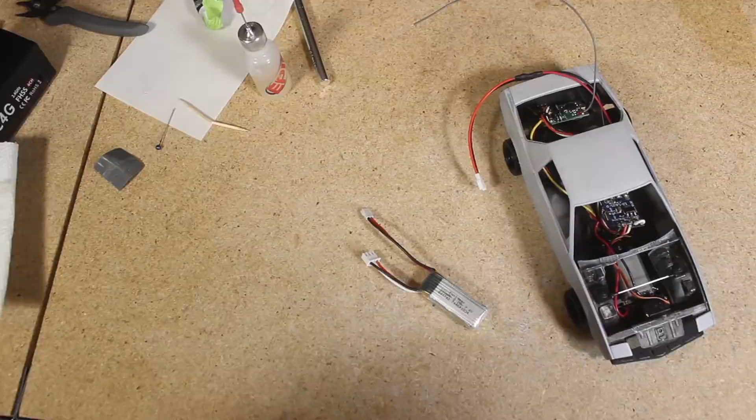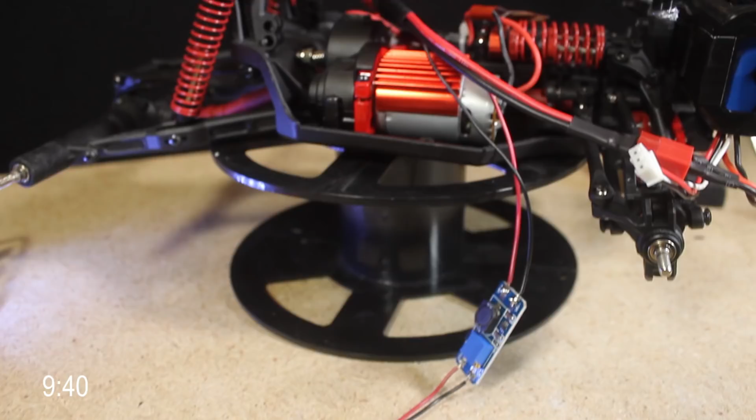Hello everyone! In today's video, I continue with the Firebird Drift build by designing, printing, and beginning to install some drift missile-inspired modifications, and I continue to make progress on the 72 Chevy Prerunner build by completing the post-print finishing work on the bedside pieces, as well as coming up with a way of mounting them to the truck, and I begin wiring for the lights.

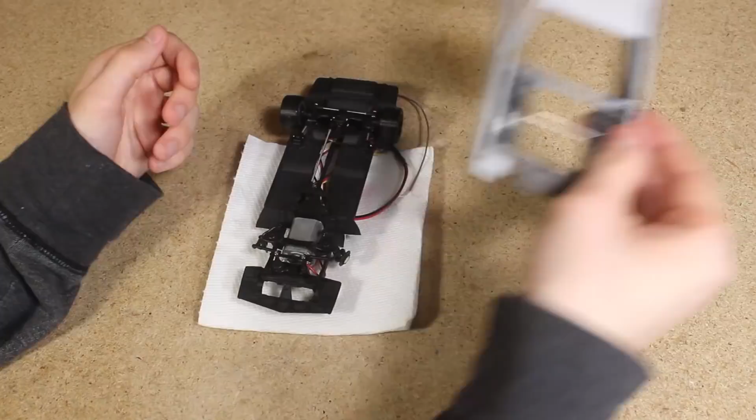Starting off with the 1/24 scale Firebird Drift project, this has been a build that I've showcased many times previously, showing the process of converting this Monogram model car kit into a fully functional and highly detailed radio-controlled vehicle. As I discussed the last time I featured this project, with the electronics, drivetrain, and suspension designed, printed, installed, and the car functioning well, I'm beginning to move on to focusing more on the cosmetic aspects of the car.

With that said, I did spend a chunk of time this past week messing around with the front suspension, trying to get it to move as smoothly as possible. The front suspension on this car is by far the most difficult part of this build, due to the modified McPherson strut setup. This is very difficult to adjust and get to move smoothly, especially in this small scale, as well as the fact that the top part of the strut is connected to the body, rather than being part of the main chassis piece.

Having the front suspension apart did give me a great opportunity to paint the wheel mounts to look more like brake rotors, just to add a little more detail.

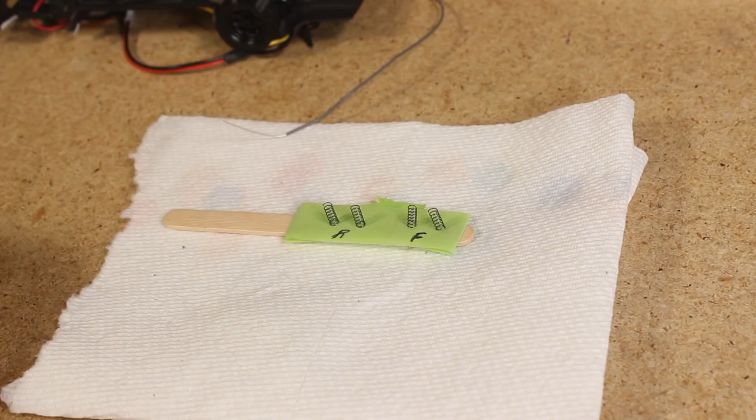In addition, I also wanted to paint the springs. Although the painted springs are quite subtle, I really like the little bit of extra detail that they add to the car.

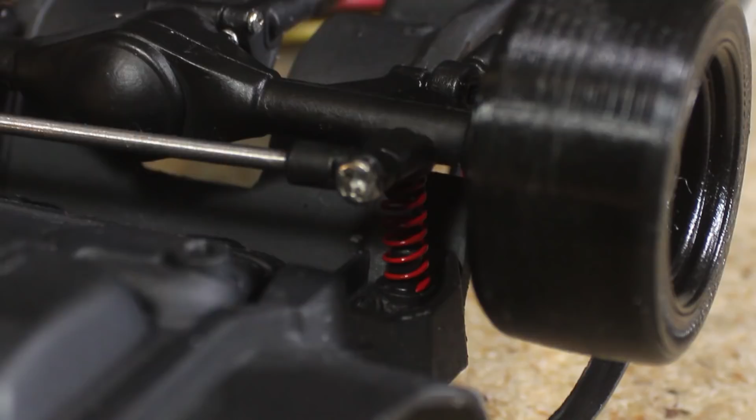Once all of the paint had dried, I reassembled the front suspension components.

I also added a hole so that I could insert a screw to help support the motor, since as you may recall, while driving previously, the heat from the motor caused the plastic motor mounts to bend, and this was just a very simple solution that I figured would stop this from being an issue.

These changes and adjustments to the front suspension certainly had a positive effect, although the front suspension is still not great. At this stage, I really don't want to invest any more time working on it. For now, it's good enough. I'll be using the second Firebird that I'm building as an opportunity to hopefully further improve upon this design.

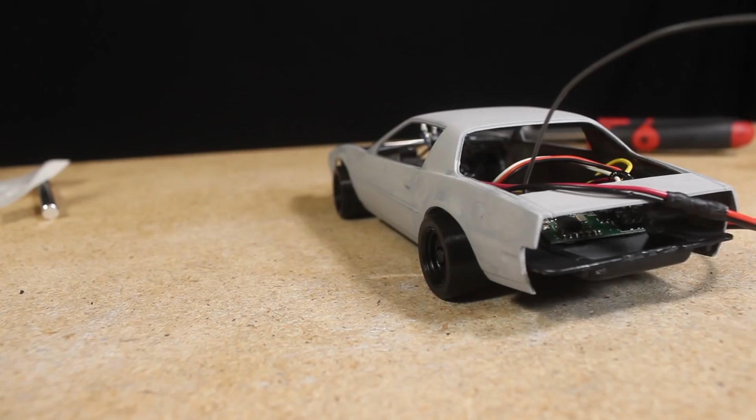While I was waiting for some new parts to be printed and for the paint to dry, I wanted to begin working on some parts for the front and rear of the car. I decided that I do not want to install the factory front and rear bumper covers, and instead designed some parts that make it look like the bumpers along with the taillights have been removed, and I wanted to add a place to mount a bash bar onto the front.

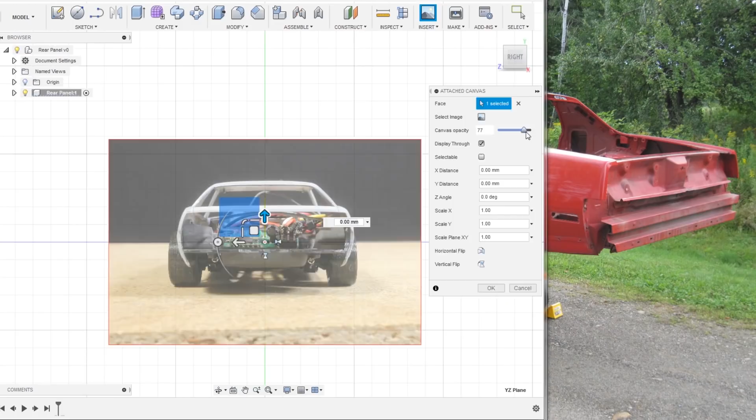I showed the entire design process of these parts in a previously uploaded video, which I'll be sure to include a link to below in the description if you'd like a more in-depth look at the design process. But in short, the process to create these parts was quite easy and straightforward. I started by taking photos of both the front and rear of the car, and then taking some measurements of the openings. I then used this as a reference for designing the parts.

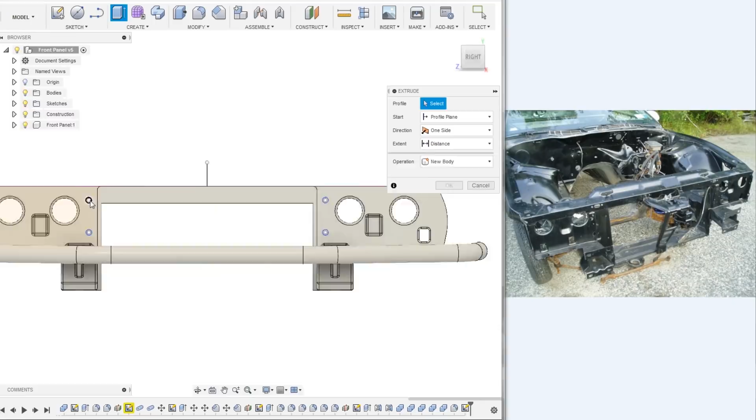Once finished with the design, I printed out all of the parts. I started by printing everything on an FDM printer so that I could do some mock-ups. Later, I printed out the front bash bar and rear bumper reinforcement piece on an SLA printer, which allows these parts to be printed with higher detail.

I began to do some post-print finishing on all of the parts by trimming and sanding away any imperfections, as well as test fitting the parts and drilling out the holes.

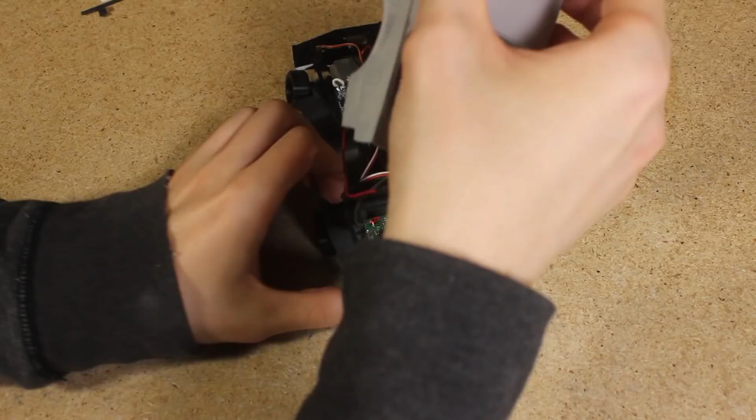I determined that I would need to make some minor modifications to both the interior tub and the body in order for the rear panel to fit. I needed to remove both of these tabs that help align the body and the interior piece. Before doing so, I traced around the outer edge of the interior tub so that I would have a reference of exactly where it should be positioned.

The rear panel can now fit exactly where it needs to be, though I needed to do some sanding around the outer edges.

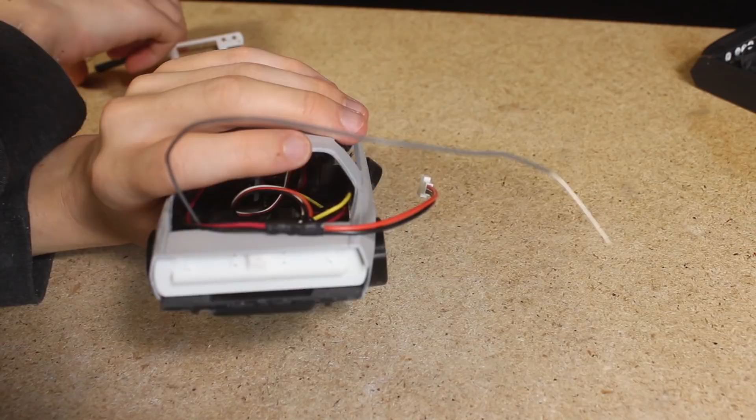Next, I did a quick mock-up of the rear panel and bumper reinforcement. I noticed that I would need to make some modifications to the chassis. The first thing I would need to do is remove some of the material from the back edge, allowing the bumper reinforcement to not extend out too far.

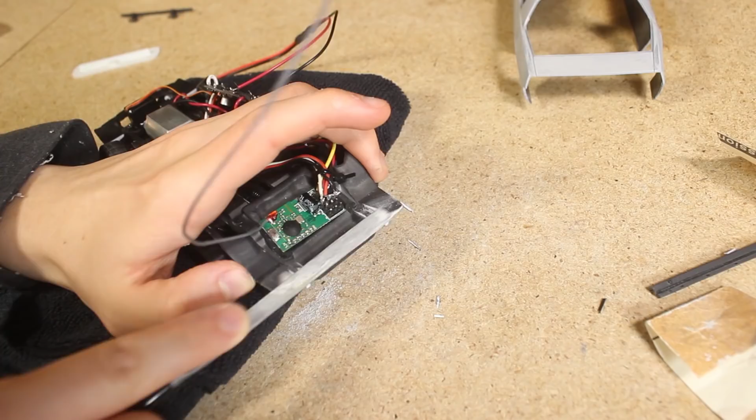I also sanded this top section smooth to allow for a small piece of styrene to be glued over top of this opening.

Although I'm already really starting to like the way this back section is looking, I want to continue making some more modifications to the chassis, as well as possibly redesign the rear bumper reinforcement to be slightly larger and not extend quite as far out.

At this point it was getting quite late, so I decided to call it quits for the evening. But I'm looking forward to continuing with this build, and I'm especially excited to see how the bash bar looks when installed, and to see everything painted. Of course, I'll be showing all of that in a future video.

So I've been continuing to make some progress on the Prerunner project. I uploaded a video several weeks back where I made some bedside pieces and did some work on the body and fender flares. I also installed some magnetic front body mounts, which I now needed to glue to the underside of the body.

I used Shoe Goo as an adhesive and then simply pressed the body down and ensured that it was positioned correctly.

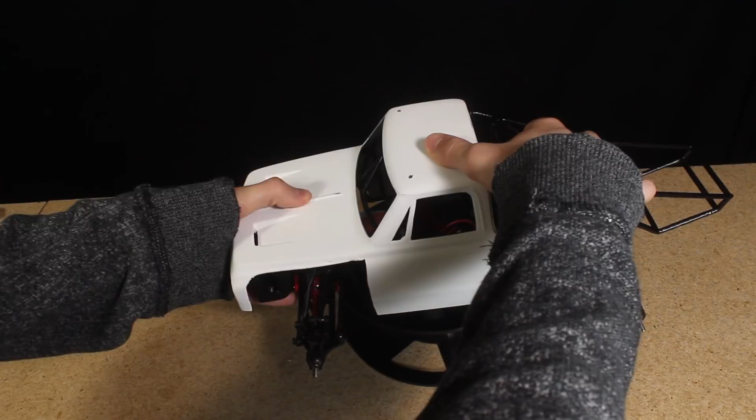Moving on to the front fender flares, as you may remember previously, I used acetone vapor to smooth the ABS plastic that these parts were printed in. I then applied several thick layers of primer to help further smooth out the surface. After allowing the primer plenty of time to dry, I began sanding the surface until it was smooth and ready for paint.

Next, I moved on to smoothing the bedsides. These were printed in PLA, so using acetone like I did for the fender flares won't be very effective. A bit more labor was necessary in order to get these parts smooth and no longer looking like they had been 3D printed.

I started by using some coarse grit sandpaper to begin smoothing the transition between all of the layers, especially on the top section, which is where the layering is most visible.

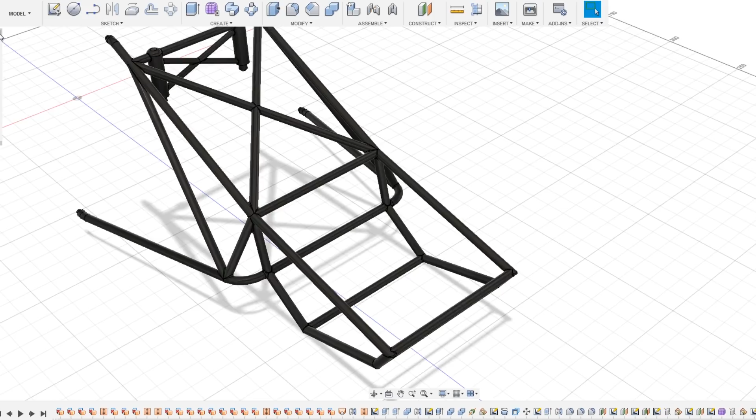I was able to begin brainstorming some ways to mount the bedsides to the rest of the truck. I designed a mount that I will use to secure the rear section of the bedside piece, which will be held in place using a magnet.

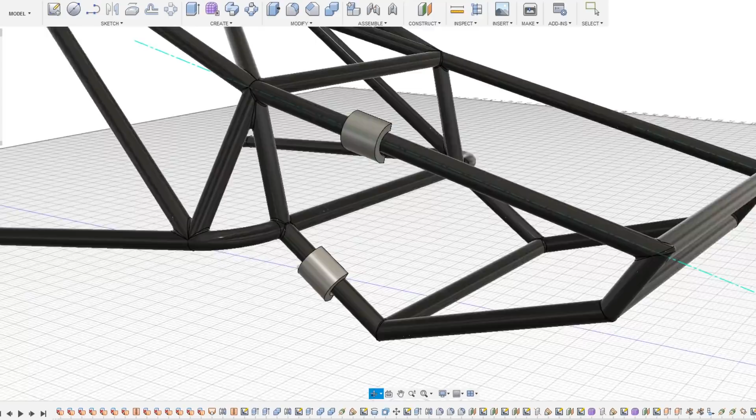I plan to mount the front of each bedside piece to the back side of the cab. I will probably just use some styrene to fabricate the front mounts, but for these rear mounts, I used Fusion 360 to design them.

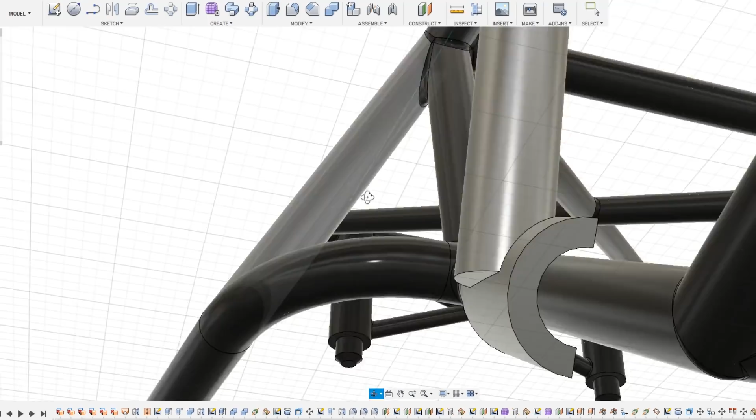I then printed each piece and test fit them to make sure they will fit.

With the mounts looking like they will fit great, I begin sanding each piece and later layered on some thick coats of primer to give them a smooth surface.

I also printed the light buckets for the front grille that I designed and printed previously.

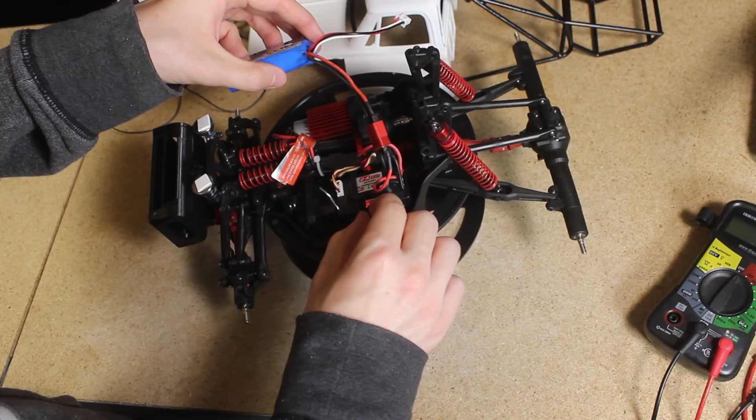Next, I began working on the wiring for the lights that I'm adding. After a quick test to ensure that all of the electronics are functioning correctly, I began working on the wiring.

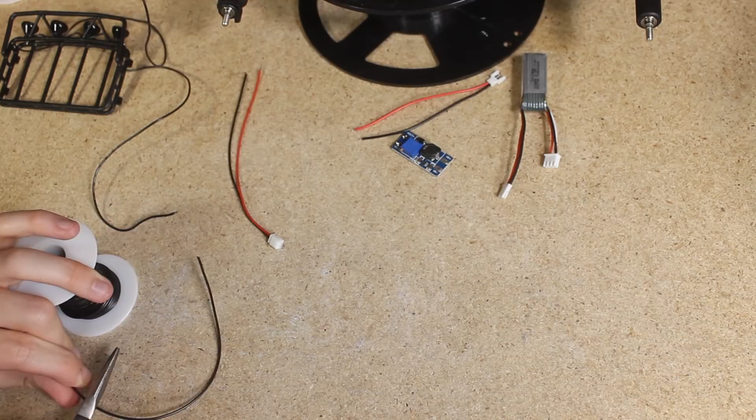I did not have any 5mm white LEDs on hand at the time for the headlights, so I'll be waiting to incorporate those. However, I wanted to get started by wiring the LEDs mounted on the roof rack to the truck.

I started by soldering on a connector that will allow the wires that lead to the roof rack to be able to be disconnected for when I want to separate the body from the chassis.

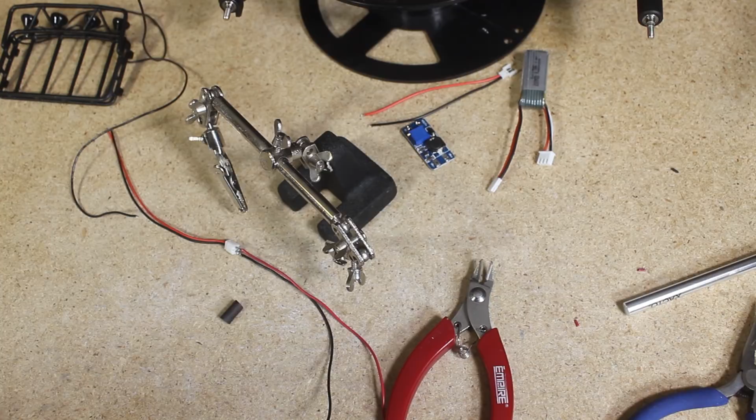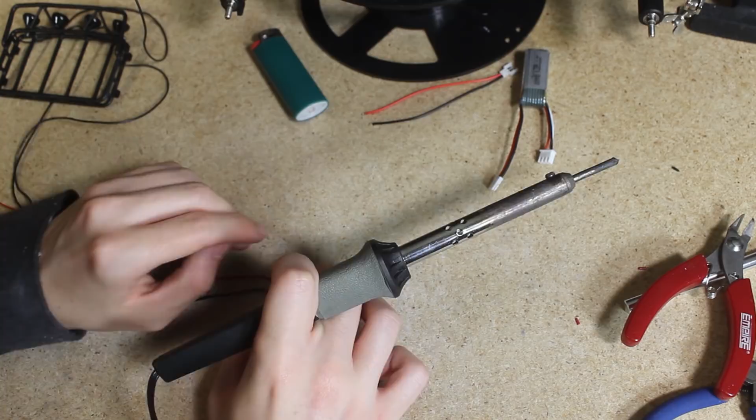I will be using a small voltage booster to increase the voltage so that all the LEDs in the series will be illuminated. I go ahead and solder it to the connector. I only loosely soldered the roof rack wires since they will need to be disconnected before I mount the roof rack onto the roof of the truck.

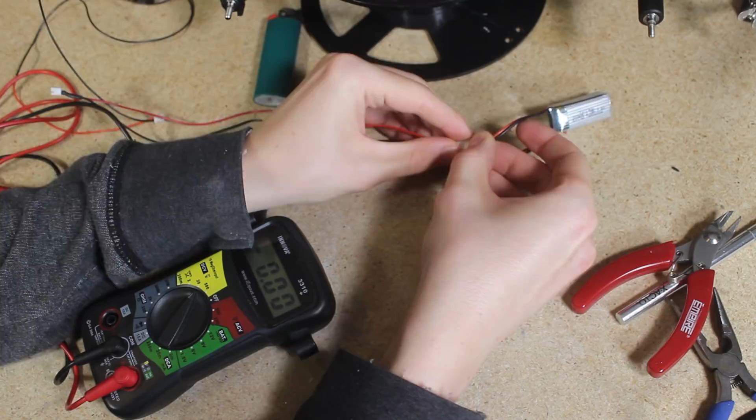As long as the input voltage is within spec and is lower than the output voltage, the voltage coming out of the booster will be the same regardless of what voltage the battery is. Simply adjusting the potentiometer sets the output voltage.

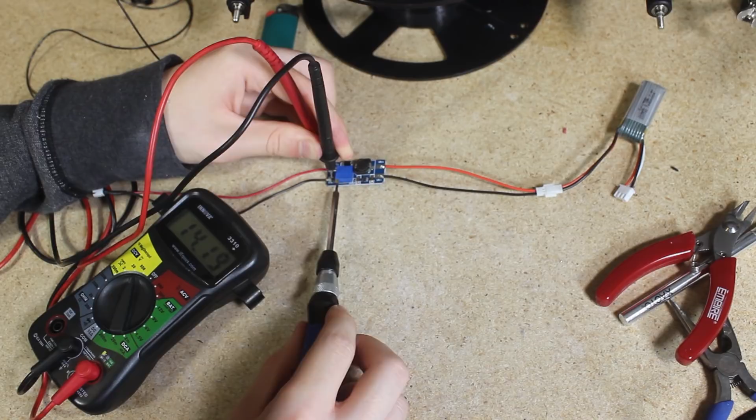I test the circuit to ensure everything is looking good so far.

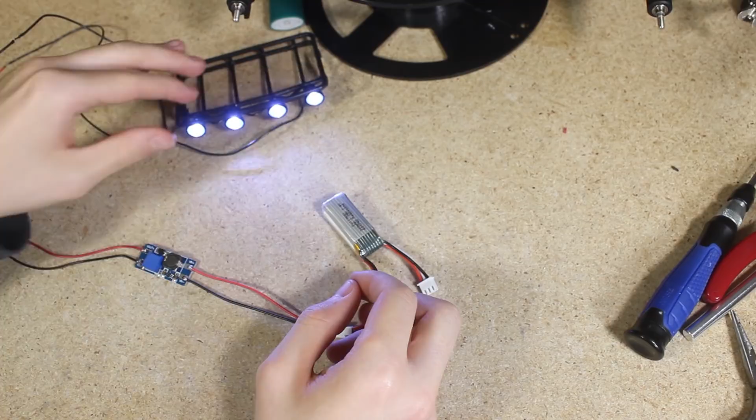To power all of the lights, I'll be splicing into the wires that lead from the battery to the truck. With the battery mount relocated to the front, I need to make an extension anyways, so I will incorporate wires that will power the lights into this extension.

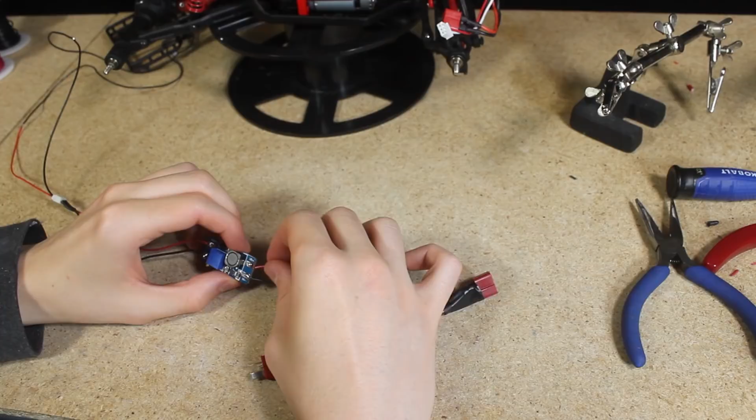And once again, I make sure to test everything.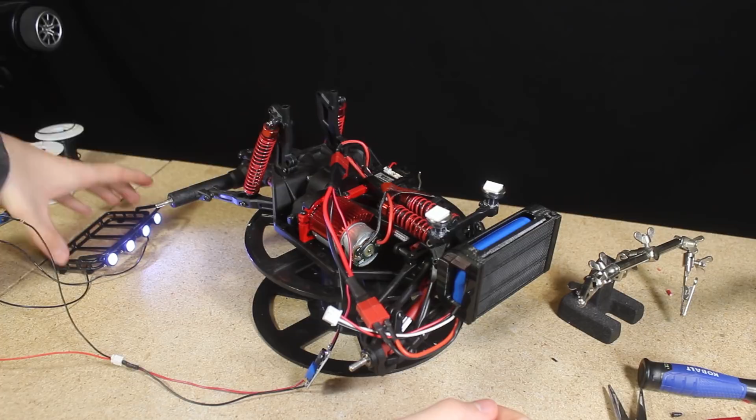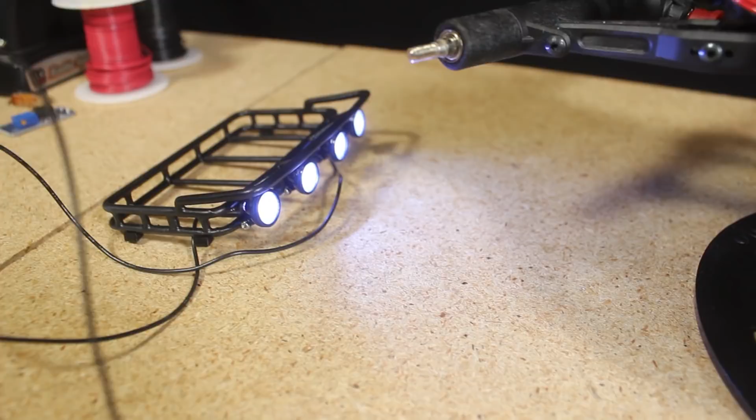I will be incorporating a switch into the circuit so that I will be able to turn the roof rack lights on and off independently of whether the battery is plugged in, and I'll probably add a resistor into the LED circuit for good measure.

Here I used a zip tie to secure the battery wires so that they don't come into contact with the suspension components.

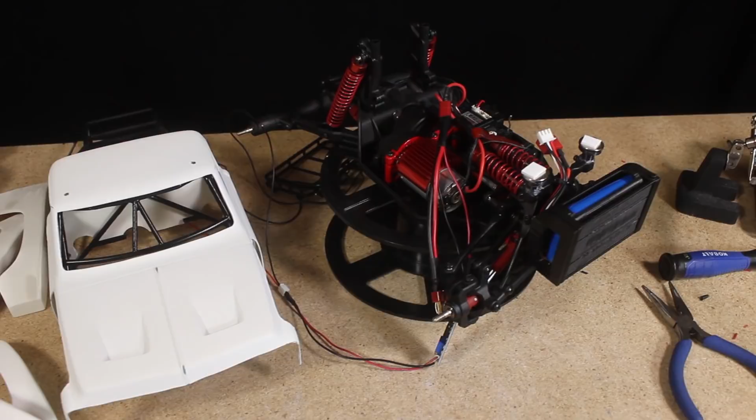And that is where I'm at right now with this project. I'm currently waiting on a few parts to arrive in the mail, and I'm also thinking about what kind of paint job I want for this truck. I haven't decided on anything yet, though I do have a few ideas.

And to conclude today's video, I want to showcase some of the amazing vehicles and projects that have been showcased on the Make It RC Facebook group.